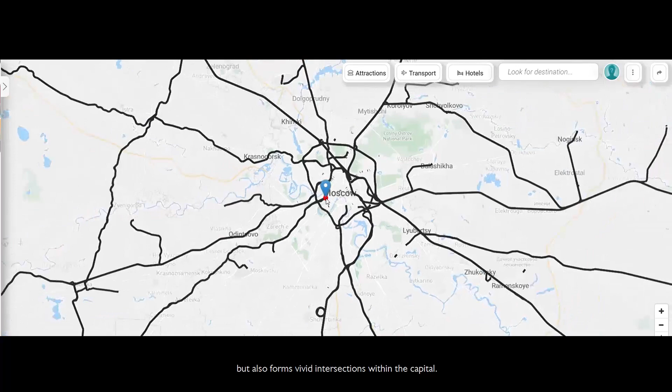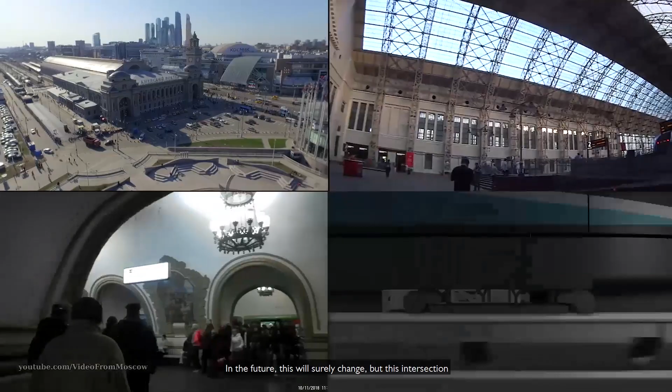The Kievsky Station is part of a bigger transportation network in Moscow, which not only connects the city with the rest of the country, but also forms vivid intersections within the capital. These are easily accessible places due to the high number of possible connections, from train to bus or from metro to taxi. In the future this will surely change, but this intersection and easy accessibility will always stay.

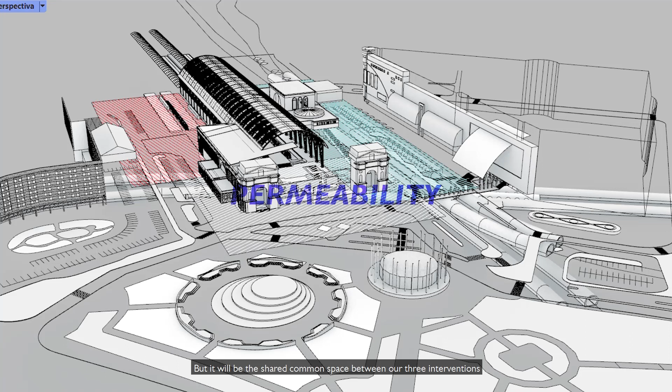Our common strategy is to work around the edges of the station in order to increase its permeability in all directions. We will not intervene architecturally at the Shukhov platform hall, but it will be the shared common space between our 3 interventions as a public space. Yet we'll be respectful with the rich cultural heritage of the entire building.

Our interventions have as objective a mobility based on people, but which transcend other dimensions: ecological, informative, and cultural, aspiring for the station to evolve from a mere intersection to also a place to stay and enjoy.

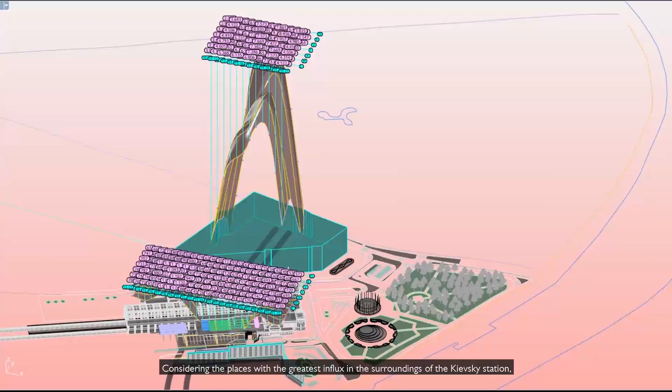Considering the places with the greatest influx in the surroundings of the Kievsky Station, such as the large commercial areas and the markets, a varied collection system is proposed which allows recycling at source from anywhere in the neighborhood. On top of the neoclassical building, the recycling center rises up with a local-scale strategy.

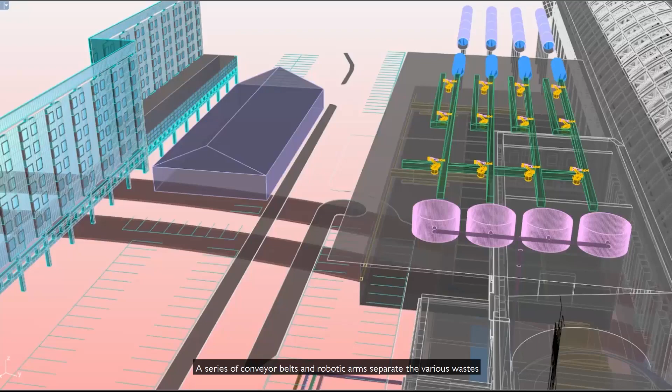It receives the waste by direct access to the tipping deposits from the collectors. A series of conveyor belts and robotic arms separate the various wastes that can be recovered from those that cannot. A glass facade allows visitors to observe the recycling process, revealing the growing interest of Muscovites in achieving the goal of zero waste.

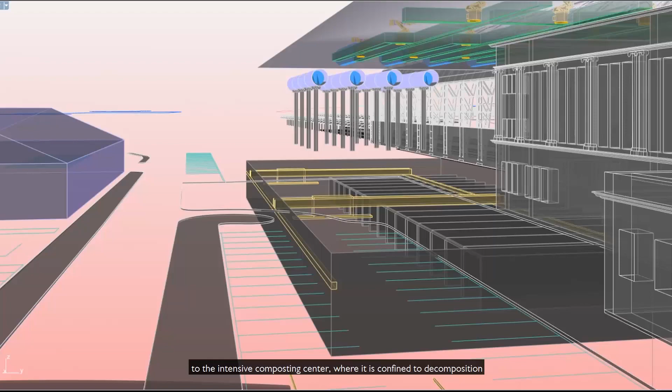The highly degradable organic matter is conducted on a conveyor belt to the intensive composting center, where it is confined to decomposition and maturation processes in a series of tunnels.

Only the rest fraction of those materials that cannot be reused or recovered are taken to a fully buried incinerator, where the energy is recovered and used in the intervention and the vicinity.

The recovered materials that were stored are loaded in a hyper-speed rail to be delivered to recovery plants, industries, and farmers. Hyper-intensive vertical horticulture and agri-food laboratories complete the proposal.

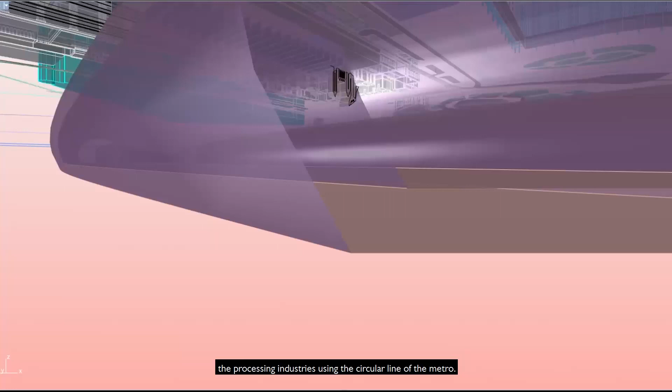The station becomes a hyper-connected node that during the night, at the end of the passenger use, sends the materials to the processing industries using the circular line of the metro. The station city becomes an attractor to stay there and become a place where inhabitants and tourists share experiences and socialize.

My project focuses on the informational dimension through a media broadcasting program based on 2 factors: hyperconnectivity and the duality between what is visible and what is not.

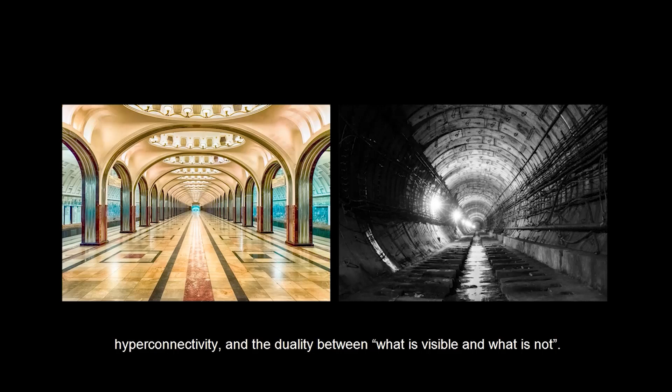Firstly, hyperconnectivity finds a strategic point in the station and its surroundings, since the Moscow Metro is the largest public city network that gathers people and offers free Wi-Fi, which also represents a virtual gathering of data and information.

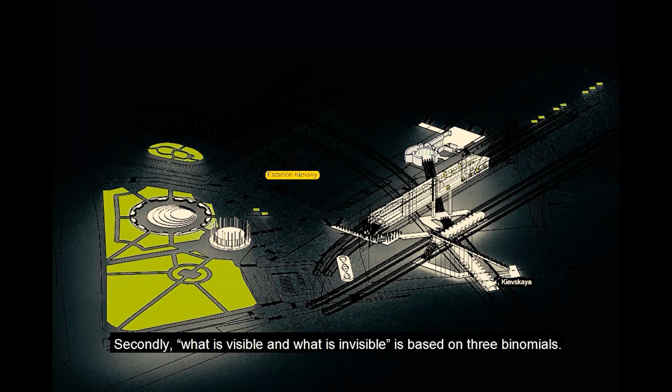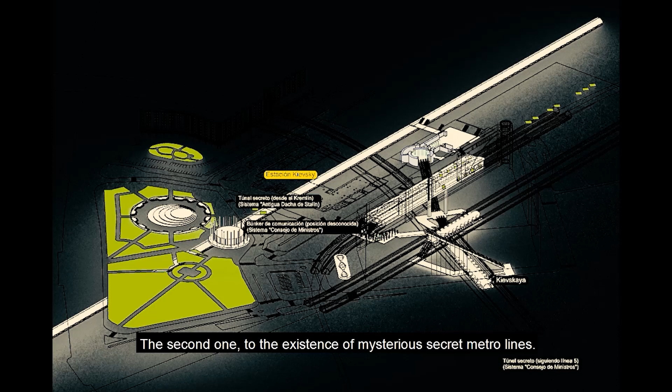Secondly, what is visible and what is invisible is based on 3 binomials. The first relates to the abstract character of data as opposed to people, the second to the existence of mysterious secret metro lines, and the third to a divided programmatic distribution, one part being superficial and the other remaining underground.

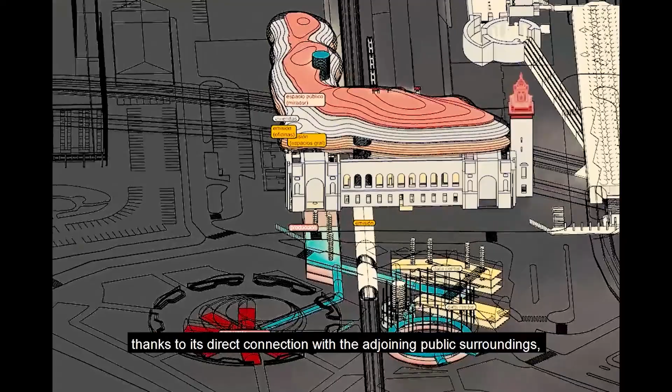The project looks for both the informational permeability of the station on the surface and the living possibilities offered underground, thanks to its direct connection with the adjoining public surroundings, where some spaces are public, others private, and some are still secret.

In this way, the station becomes a digital hotspot, rethinking the limits of physical mobility versus virtual mobility. It no longer is a mere interchange, but a data and information epicenter at multiple levels: the station itself, Moscow, Russia, and even the rest of the world.

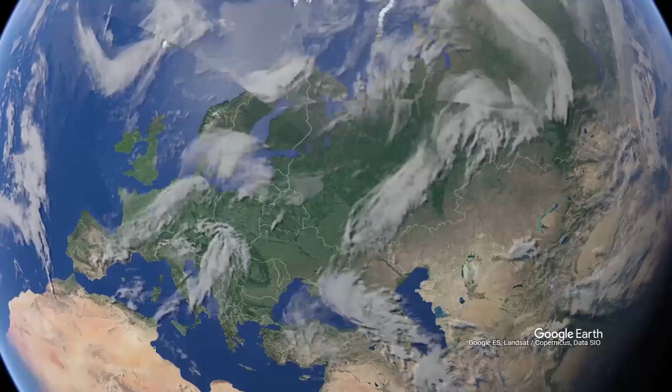Russia, and especially its capital, has always been an important center of classical art and culture. Some of the world's greatest pieces of literature, music, ballet, and operas came to life in Moscow with its architecture as background. Even after the revolution, Stalin used a neoclassical style as a tool to promote the socialist ideals in public buildings.

Compared to the grey residential areas, these luxury train and metro stations are part of the Russian cultural heritage. This kind of architecture contains the most important transportation hubs of the city. These hubs are ideal places to connect the rich cultural heritage with the people that are already there.

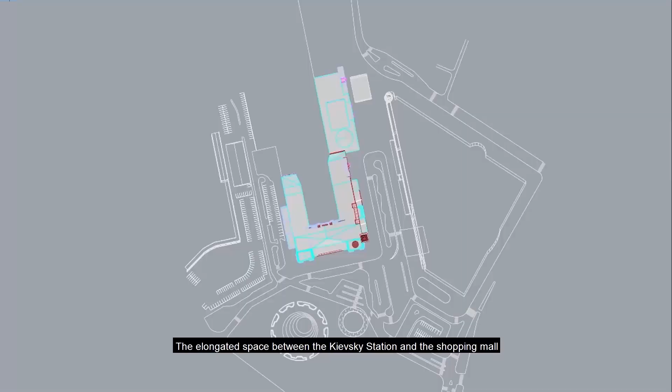Forming a new open and public cultural space, the elongated area between the Kievsky Station and the shopping mall will be used to place a theater school and create a public space with qualities of an ancient Greek agora and the Las Vegas Strip.

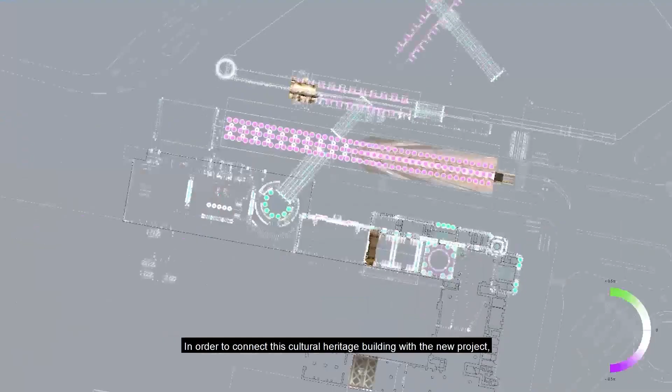The theater will turn towards the station, using the rich facade composition as a stage. In order to connect this cultural heritage building with the project, the north part of the station and the metro platforms underneath are then analyzed through its details on every surface.

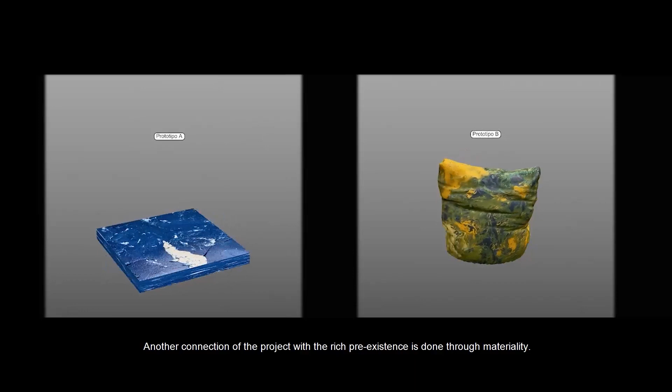The different densities of details will determine the optimum parts of the station for the project. Another connection of the project with the rich pre-existence is done through materiality, exploring new ways where materiality can trick the eye of the users.

With the Venetian technique of scagliola, we can imitate marble with a moldable material that can capture ephemeral forms affected, for example, by the forces of gravity.

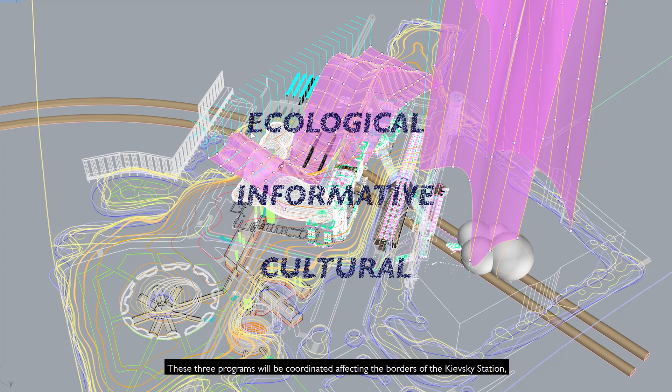These three programs will be coordinated, affecting the borders of the Kievsky Station, increasing its permeability and providing this new perspective on future mobility.